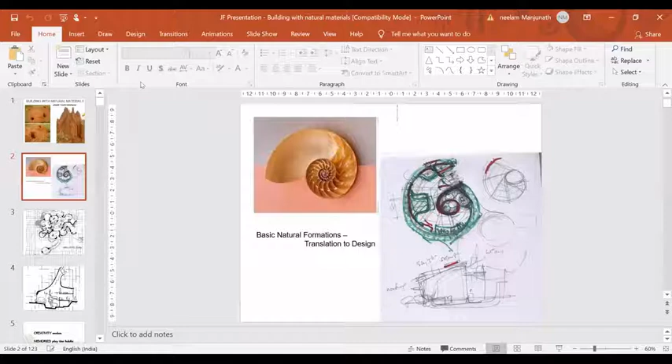This particular subject which you put to me, Tejas - are you going to run this as soon as I start, or afterwards you're going to run? How are you going to, where is he? The background? Hello? Yes, we've started, sir. Okay, when he starts it in the beginning, ask him to hold it. After that, he can continue with this. Is that okay? Hello? Can you hear me?

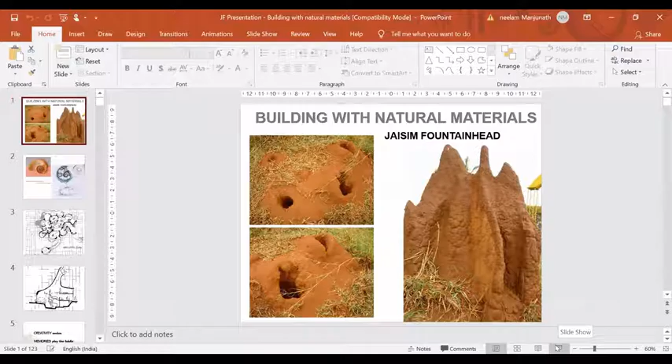Yes, Tejas, you can talk to sir when required in the meeting. Okay, they just hold this, and then I just started with, when you said building materials and things, the first slides and a few slides that will come are all been inspired by nature. These were the first few things I studied a number of times. You don't have to hold the slide too long. Hold it for the moment that you think I'll keep crossing across and going. No problem, okay, they just go ahead.

No problem. Yeah, next - this anthill has always been one of the most... nature is one of the most fascinating things, like the beehive and the various shells and things that happen to me.

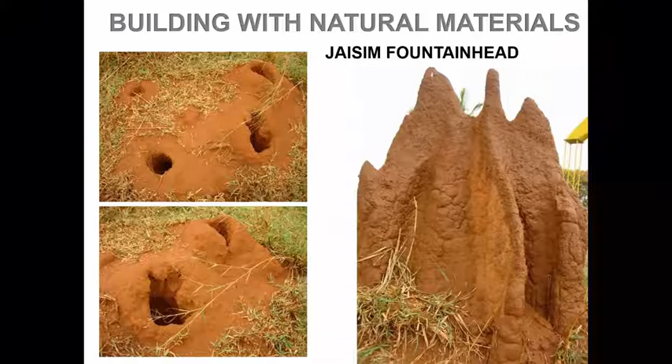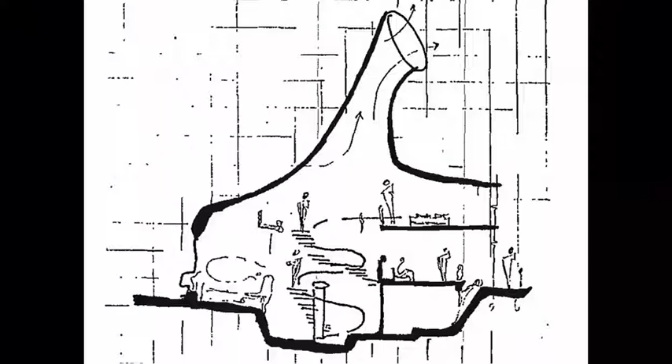Whenever people call about nature, I look at myself, my surroundings, my teachings. Great people, fascinating people have taught me. The journey has been on and on. But every time I come across this, I find, who is the ultimate of nature? The ultimate of nature is man, his ability to comprehend. He's not away from nature, he is the ultimate of nature. That is what has kept on pushing me, pushing me.

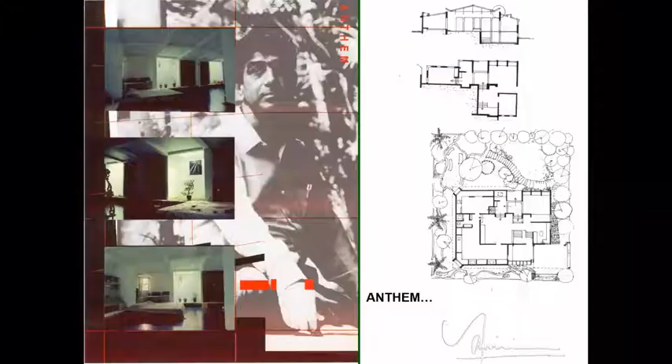Then I realized architecture is a journey. It is not something you finish, which is like nature, it never finishes, it is an evolving process. As these projects go on, each project teaches you something more to get onto the next project. And each stone and each clay block, each thing teaches you something to go on.

But every time somebody says, are you a natural architect? Are you a nature architect? I said, I'm neither a natural architect nor a nature's architect. Nature teaches me, but without technology, I couldn't touch nature. What is technology? That's the big question that keeps getting asked by the youngsters who keep looking at you.

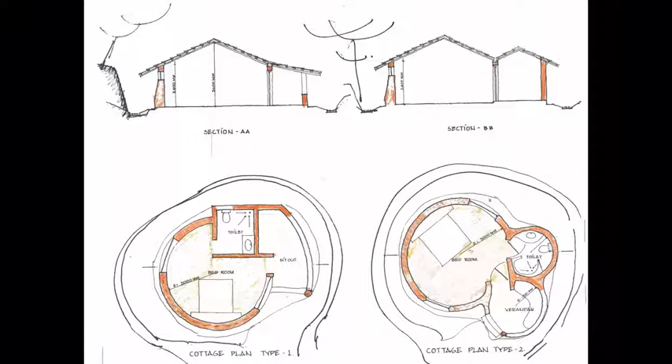Then it happens that something has happened in your mind. The mind, where does the mind come from? Yes, even animals and things have a mind and a brain, but they act within certain parameters of their lifestyle. They can't change it, very accidentally sometimes, but that is not always working. The most fascinating thing about the human mind is he thinks. If he doesn't think, he doesn't even belong to this.

Like this Rishi Valley school, that had just this modern thing, teaching these school children how to build, using local labor, local things, about 30 years old, pushing it together, cow dung, thatching roof, painting by the local artisans, and all these things worked. I find, are they natural?

Yes, they are natural to their environment, but they also have to learn. They had to learn, like this aerospace engineer, from one end we shift to another end. The aerospace engineer also looks at you and looks at the nautilus, that's why I showed you the shell and the beginning, the octopus. So how is the octopus? It's the most fascinating structure, which is again nature.

Nature teaches you in many ways, but nature teaches you in the sense, it doesn't come and teach, it is there, it lives there. It's up to you to go and look at it, to study it, to understand it, and then take it a step forward because your brain, your mind works.

Whereas with a bird or an animal, it just reacts, responds, and moves along to its future, maybe the death, maybe another generation, something happens. They live with their environment. Whereas the human being alone is a natural being of different characteristics. He can change what is before him, what is going to be after him, but he can't change what was before him, what is after him, what is with him. But when he changes that, he has to understand the nature of things.

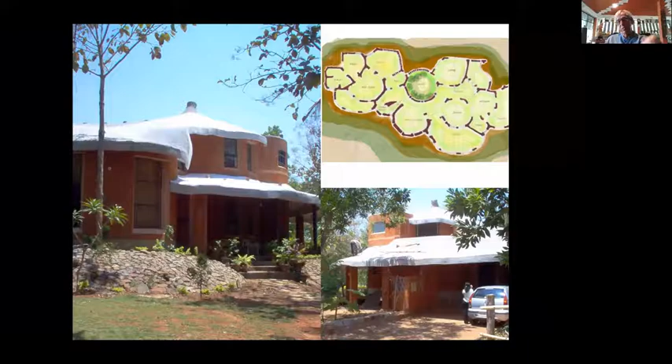Like I look at the crystals which were used for the roofing, white feldspar. It was the nature that looked at me, and I looked at it, and said why can't I use it? Technology and past engineering said no. I said, that is not nature. We have to look at the material and say, who has studied you? Why has anybody studied you?

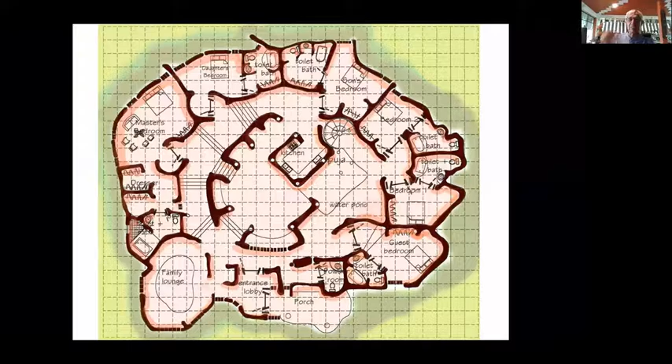When people ask for Vastu Shastra or patterns which create in their minds, you work with them and say, we will create an organic space for you. Now I'm using another word, the organic space. What is organic space?

It was fascinating to see him look at buildings as simple lines. The minimum is what you used to call them. The minimum it is. But then I looked at nature.

When I looked outside my window here and outside this window here, the combination of diversity really hits me. It really hits me to a point. This is when I start subtly differing from the Western concept of architecture, where they're very disciplined.

If one fellow builds house A, next fellow builds A, the whole housing colony is a repetition of the same type of housing. But when you come to India, when you come to the subcontinent, when you go down, you see the variety that happens. Yes, it's absolute chaos in the beginning. But if you start studying the chaos, then you look at nature.

Nature smiles and goes, only the gardener makes us orderly. Even with the gardener, nature fights. Each rose flowers where it wants, when it wants. The gardener cuts it and puts it in a pot.

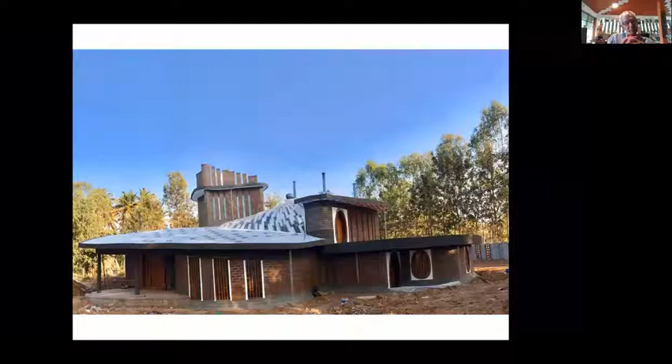When that plant grows vertically high, I was amazed to notice that no leaf on top sits on another leaf. It always moves out a little bit, the other moves out a little bit, and then it goes on. It's absolutely fascinating to see.

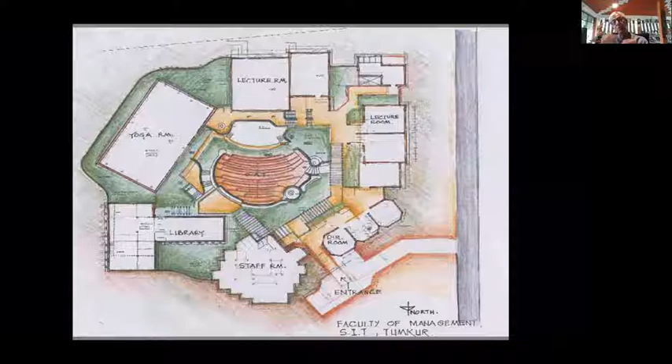That's what taught me to move modules of buildings away from each other, not to overcrowd like modern apartments are built one over the other. I call them non-architects, non-buildings, non-nature, but then they're also from nature. No, they are the absurdity of nature that's happening in modern architecture, built spaces here and around.

Why can't they subtly change, like that anthill in the beginning of the bird's hive afterwards, or like the tree in the beginning? Why can't each stone speak to us?

When we did this management school also, we looked at it and said, what can it teach you? Then we said fusion happens. In fusion, what happens? Can everything start fusing with one another? Like I said, nature's diversity is there. Then there's the question of bringing them together. What happens at that time?

That must, and this is very important to me. At that time, you just keep quiet, look at the tree, look at the flower, look at the animal, look at the bird, and then say, what do I do with you?

Like when we did this huge project, which was nothing but sheds of cigarette-making sheds, I said, it made cigarettes, it made money, now it has to transform itself into another avatar. What do I do? I talked to the building in a way of speaking. I talked to the building, it responded, and then to say, fascinating.

Let me change you. Let me have the challenge of changing you. I found we could create a new avatar in that building. That's the change of challenge which comes from nature.

These trees, cut just because they were natural trees, doesn't mean they have no other purposes. Nature teaches you and says, don't junk me. I will always be useful to you in one form or the other.

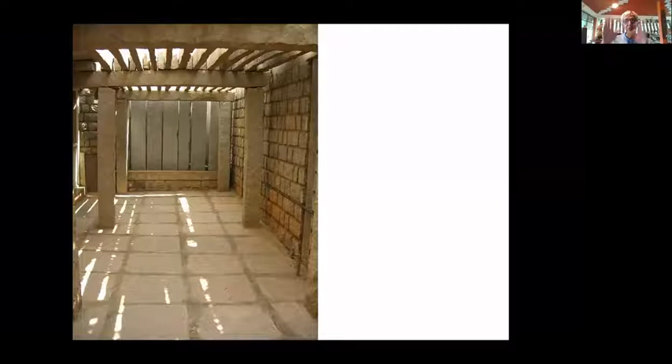It's a question of what your concept is. What does not belong to something? I was looking the other day, people were calling mud bath, dirty bath. Then I went to a small place here, a yoga center or something. I found all the women there covered with mud, eyes packed with mud, with lots of cow dung stuck on them. They didn't know the cow dung was also put on them. They were curing - that is their yoga bath.

There it becomes wealth, it is not thrown away. It's a question of how nature interacts with you, when, in which context, which complexity. Even when you go to the tribal village and use the Todas space where they've had something else, today it becomes something else - it becomes an auditorium. The boat was thrown away and it becomes a boardroom. It's a question of an architectural challenge that is accepted in nature.

Nature is very teaching for this. This is why I like saying nature teaches, teaches. But it doesn't push you. It doesn't fail you or pass you. It just smiles at you and goes away. And smiles at you again and says, you took the wrong turn, go back and take the right turn, or take the other turn. Then you find something else it does. But then you said you were thinking right, but you didn't combine it right.

When I looked at the stone blocks right behind me here, the stone was lying all over. People said, I have to buy blocks. But the stone said, I'm here. So automatically something happened - the same thing happened to the school and that process. Something keeps exchanging itself. We environmentalists, architects, have to get to the people and teach them the process of life, the process of urbanization, which can happen in a natural process.

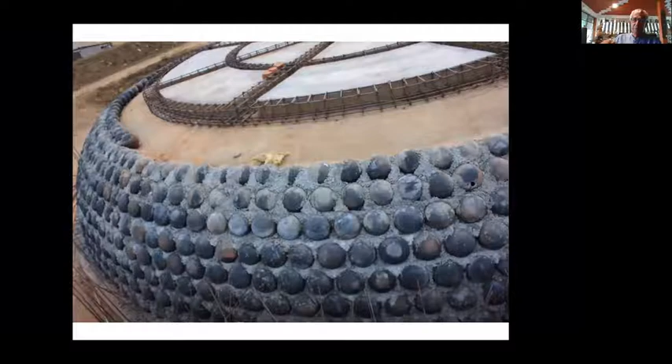The only time I find what is not natural is when the mind is driven by pure technology, forgetting the art part of it. And then the mind takes you on to the pure economics part of it, and the pure economics takes over. And when pure economics takes over, something comes one over the other, because economics says repeat and repeat. Like you are repeating the same slides again, now and then - sometimes, yeah, it's fun. But the process is very, very important. It must be very well understood.

So this is the last slide on this. Have I finished my time, or is there time left for anything else? Tell me, Nilam. I can go on and on, you know me better. You're muted, I can't hear you. Is there anything else, yeah. Yes, sir. Have I taken my full time off? Looks like so. No, sir, don't worry, it says 16:26 to me. Anyway, okay, is it okay? Yeah, some of the questions you have already asked, some more, so please - you have already shown.

We were talking about so many other kinds of natural materials and technologies for a very long time, and never shy of taking huge risks, which you have already shown and shared with us. But one material that you have extensively worked on is the hollow terracotta block. You have been instrumental in popularizing it and developing highly innovative construction systems to use it - making it dance to your tunes, literally. The roof becomes the wall becomes roof, and it goes from walls to columns to beams and walls. We are very eager to listen about that material, because you have done a lot of effort and we are all very inspired by the uses you have done with the hollow terracotta blocks.

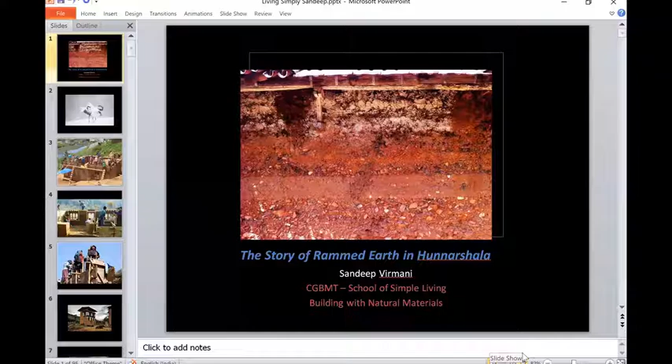Let me start with a few stories which have nothing to do with my work, but finally lead up to it. I was in Bhutan a few years ago trying to find this bird, the black-necked crane that comes from Tibet into Bhutan. It's a very rare bird, so I went to a remote village to look for it. Very early in the morning, about 5am, I heard these birds making their sound.

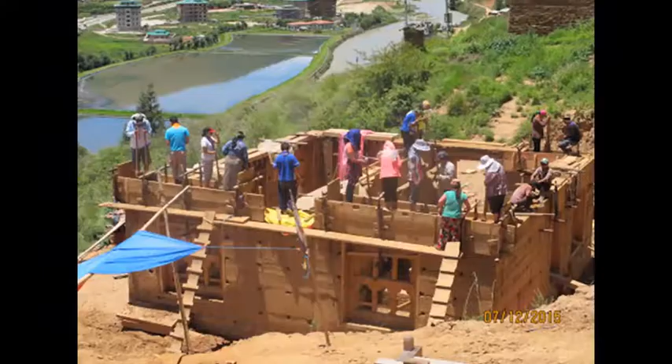As I moved towards the sound I heard some singing in the mist, and when I went towards it I found people like this - not this exact photo, I didn't have a camera with me, but this is what I found. A group of people on top of walls, ramming the wall, making new walls. There was one lady making buttered tea for all of them - about 20 or 25 young men and women building this wall at 5 in the morning. I was curious - they had a song, and the thumping was actually the drum or beat they gave themselves as the wall was being built.

When they all came down to have tea, they invited me to sit with them, and I learned they were all helping this widow build her house. They would work for about 2.5 hours in the morning, from 5 to 7:30, have breakfast made by the lady, then go off to their own work. This was free labor, free service to the widow. The fact that they were making a fantastic, beautiful wall was only incidental to the social construct of actually helping each other build their own homes - that's what I found fascinating.

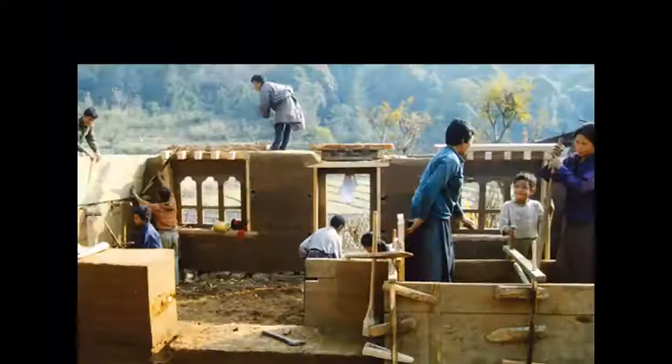In Bhutan they make amazing rammed earth buildings, 2.5, 3 stories high, without any cement or lime stabilization, simply with mud itself. These are the kind of homes that come up.

I want to take you to another story, much closer to home here in Kutch - the grasslands of the Banni region, where pastoral communities roam with their animals. It's a huge, beautiful landscape of 2,500 square kilometers, full of wildlife. The pastoralists have learned how to live with this nature and contribute to it. Unlike our urban areas where we take away from nature and try to control it, these people use simple aspects of nature for their own survival and living, while also contributing to nature and developing a fantastic economy.

So I will share with you that in this landscape, there are these buffalo breeders. These buffaloes go into their grasslands in the middle of the night and graze, because during the day it is 45 degrees centigrade temperature. The buffaloes graze on their own, nobody accompanying them. In the morning they come together at these water points, where they all get their water, and then sit down for the rest of the day to enjoy themselves.

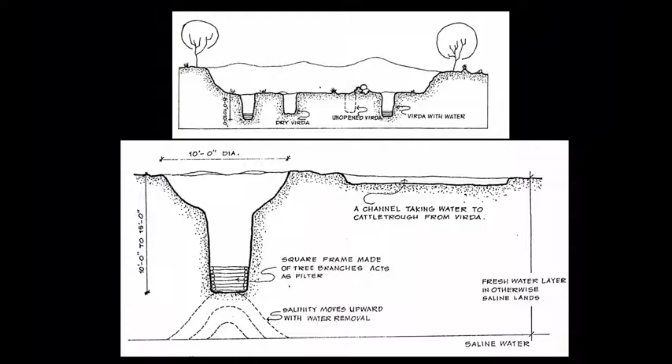So there is a very interesting practice over here called the abhat. Every well that is made like this is owned by one pastoralist. As the summers are coming close, the different pastoralists will call an abhat. This is an abhat that was called by one person, who asks everybody to come and help him make his well.

The idea is that if during the year you have had some kind of a fight or misunderstanding with anybody in your community, it becomes necessary that you call that person for the abhat. The story goes that when they call this person, they send the eldest from their family to go and invite him. If the person is very angry for what has happened in the year with him, he will refuse, saying, no, I'm not coming.

Then the family will send their youngest daughter to go and invite him. Once this little young girl comes and says, 'Kaka, please come and help us make our well,' the person's heart melts and he cannot say no, he has to come.

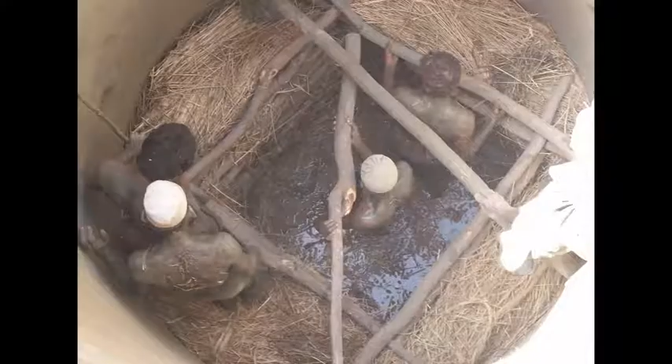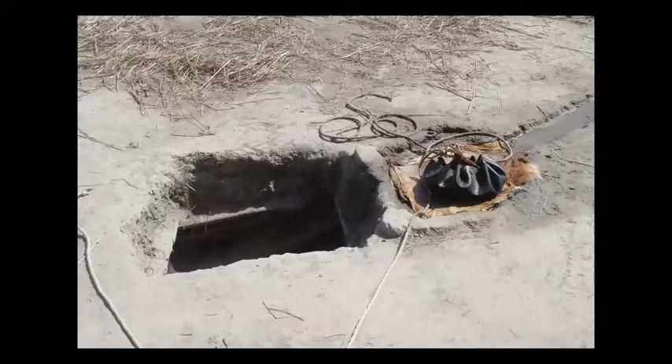So then they all get together and make this amazing well, which is made with the grass and wood from that region. This is the way it is finally completed. They draw water from it, pour it into a channel, and it comes into this trough, which is also completely made in mud.

From that, you can see in the corner there is a pathway where all the buffaloes are waiting, and then they come down to drink the water. The buffaloes also know that the trough is made with mud, so they are very careful when drinking so that it doesn't break. After that, everybody gets together and makes a meal, a biryani together, and they all eat together.

The reason why I'm telling you this story is that the entire process of building in rural areas is interwoven very carefully into the social practice of their region. The process itself is just as important as the well or the house itself. They make sure that any fights they might have had during the year, their ego must be consumed. They must invite that person with whom they've had a fight and make up during the process of building, so that the fight doesn't carry on into the next year.

Now this is extremely important because they're trying to build social capital amongst themselves. It is based on the social capital that they are able to be bold, they are able to be courageous, they're able to take on difficult decisions as a community.

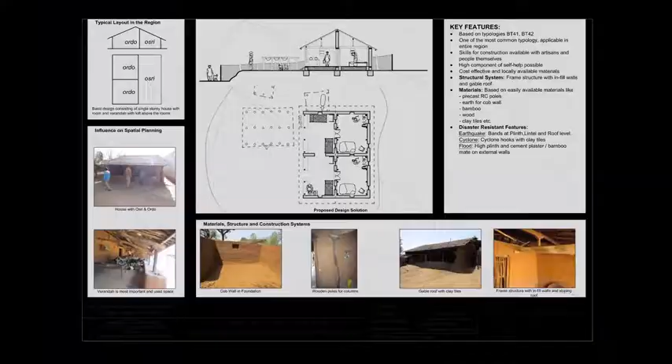They felt that it was only to be found in Ladakh or in Bhutan and not in India anymore. And yet in Gujarat, you found this 500-year-old tradition of making rammed earth homes. So these are the rammed earth homes that they build in the polo forests in the Aravalli range.

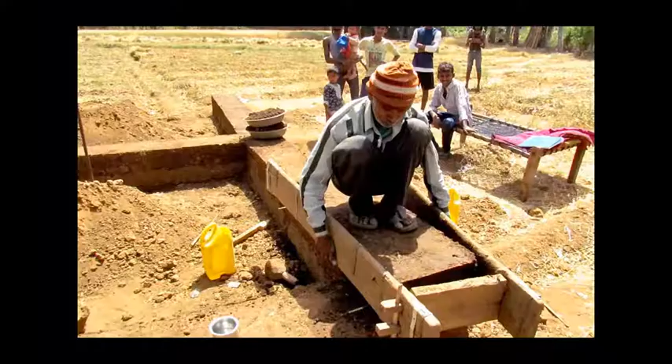They use very simple formworks like this. The practice is that they will remove the topsoil and dig up the soil below that, put water in it and leave that for about 3 or 4 days. After that, the mud just needs to be carried along with its various stone pieces in it and put into a formwork like this and be converted into walls like this.

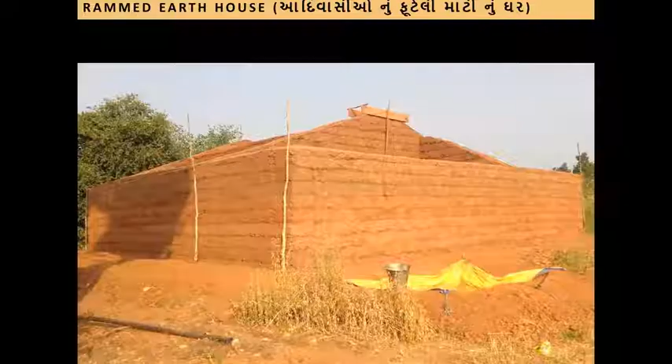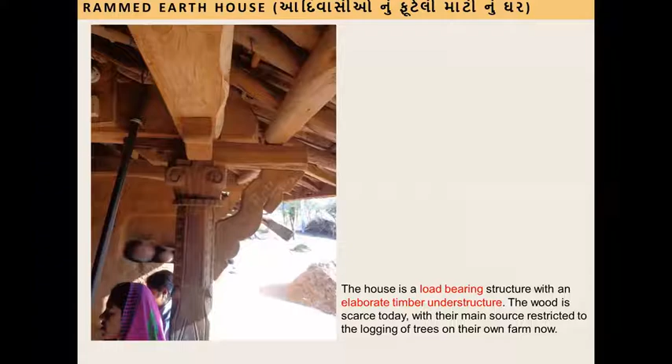So we documented this entire process with them. And then we sat down to redesign it for them, with them. We wanted to understand what their aspirations would be, what is it that they would like to change in this house that they make.

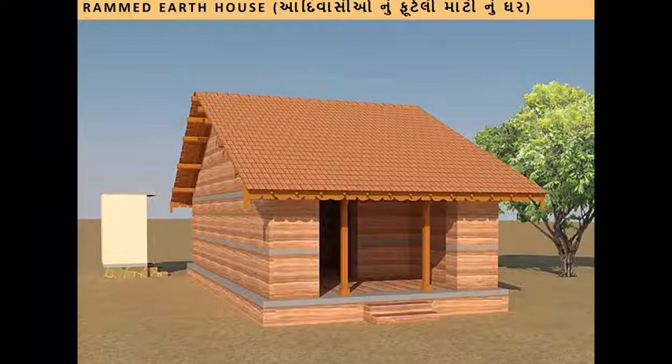And we came up with this as a social house which the government of Gujarat would agree to support. However, now coming to your question, Neelam, how do we convince governments to allow them to make rammed earth or even mud houses at all?

So a very high-powered technical committee had been put in place, and engineers from IITs and various other places were on this technical committee. And when we shared this with them, they were surprised, and they said, no, we are sorry, mud is something we cannot agree to. So we said, why don't we make one with the community and see what happens.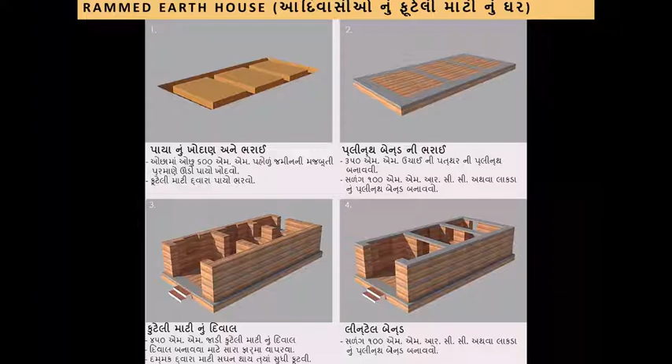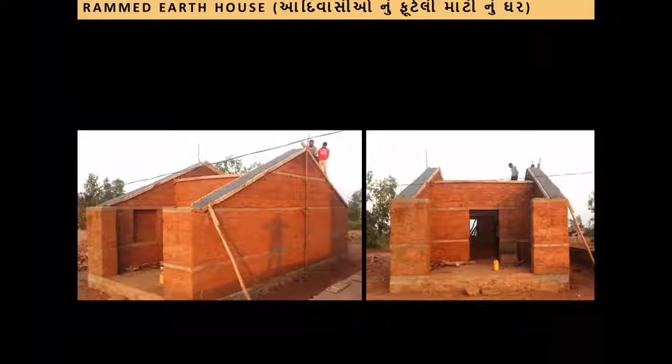So as a sample house, they agreed. This is the whole document, this was the entire documentation process, and this was the sample house that we made with the community. We put in these steel bands because it's an earthquake prone area, to connect the entire house together. And this was the house that was built.

But yet the technical committee was saying, can you supply us data to tell us why this is so strong? Because we showed them houses which are more than 100 years old and were standing perfectly all right. And they said, we understand that this is a strong house, but until and unless we don't understand the science behind why it is so strong, it will be difficult for us to put our signatures on it.

So we went to INTACH. We took a small grant from them because INTACH was keen on documenting living heritages in our country. And then we studied their sociology - I won't go into all these different aspects - but we studied their tools, their measurement systems, their proportions, and their materials.

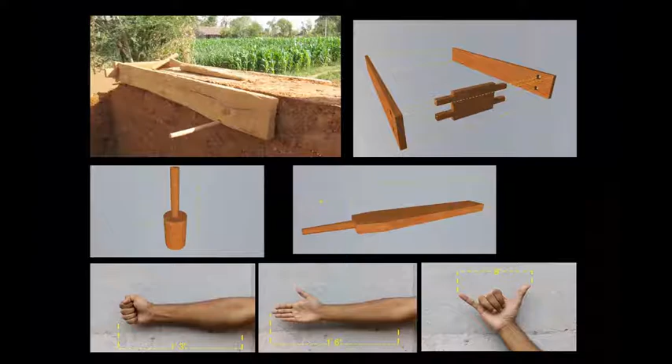So we took the soil, we did the soil analysis, and it was an amazing thing that came out. The soil was made of laterite. These were laterite soils. When Dean talks about laterite stones in his region in the next presentation, this is the soil that actually becomes stone over a geological period of time.

What happens is that when it is below the earth, it is only ferrous. But when it is exposed to the atmosphere, it combines with the oxygen in the air and starts forming ferrous oxides - Fe2O3, Fe3O4. That process of oxidation is called induration, and it actually starts converting the soil into rock, because the ferrous oxides are binding agents. So you don't need to add any lime or cement to stabilize the soil at all, because the ferrous oxides, over a period of 2 or 3 years in the wall itself, make it so strong that it can last for hundreds of years.

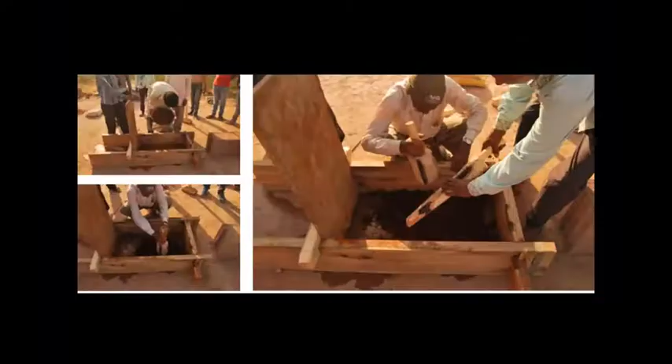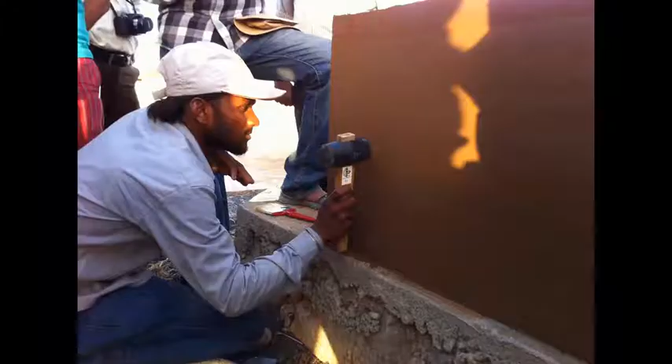Unfortunately, these are the very artisans who come to our cities and we treat them very badly. We don't even talk to them. As Jaisim said, until and unless you're having a dialogue from top to bottom, you're not going to be able to do any innovations or creation of new designs. These are people who otherwise have tremendous knowledge of not just technical work, but also building social capital through technology. So we convinced some of these young boys to form their own companies and start providing their knowledge and skills to us in our cities.

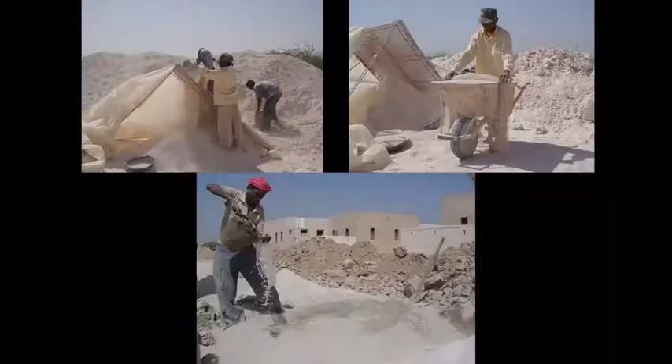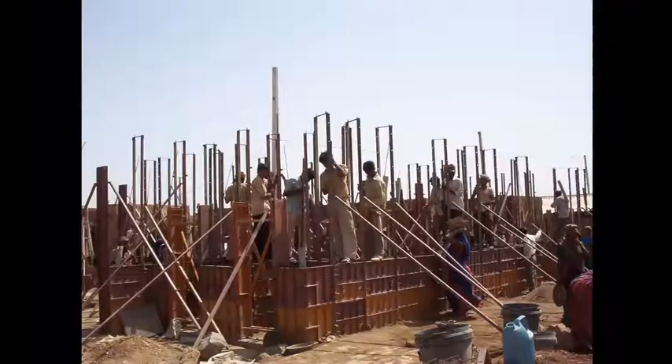Until and unless we don't have such artisans, it becomes difficult for us to build. So these companies are now providing services to many architects to achieve their dreams of what they want in natural materials. There was Ramesh, who now runs a company called Layers, and provides rammed earth and soil block technologies to people all over the country. His own turnover is about 20 to 30 crores a year. And this is the kind of buildings that he's helping us do, and helping other architects.

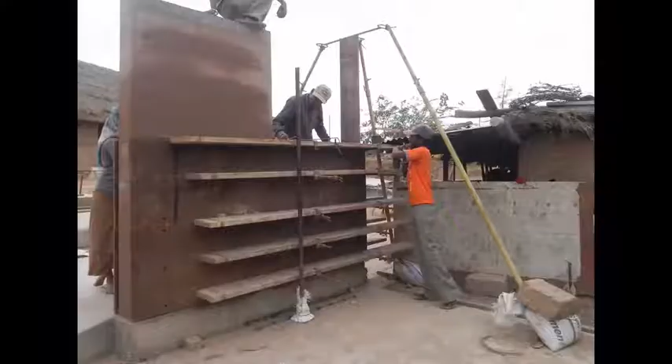This was about 400 homes in rammed earth that we did after the earthquake in the city of Bhuj. Along with him, we have developed various types of formwork to be able to make good rammed earth walls. We now use a lot of industrial waste. This white wall you see is actually from China clay factories, their variegated wastes now converted into walls.

These are cob walls. For every material, we have a community who traditionally used to do it, but is now bringing new sensibilities into it. So this thatched roof you can see is something we learned in Indonesia and Bali from the artisans there, and it has a life of more than 10 to 15 years.

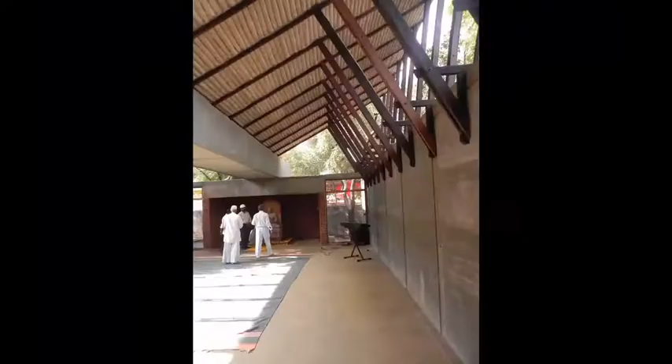This is a project by Sandeep Virmani, where we helped him with all the artisanal skills. This wall is also rammed earth, but done with fly ash. So once you understand the science behind a technology, you can use any material to be able to create those types of structures.

However, we have complicated it. When we asked these artisans from the polo forests and showed them the way we are doing rammed earth, they said, this is very complicated - we find your ways of doing things complicating something which is very simple. So here we need to modify the soils. Sometimes you have to add sand into it, sometimes clay, sometimes lime, sometimes something else. We have to have a rigorous testing mechanism before these rammed earth walls can be done.

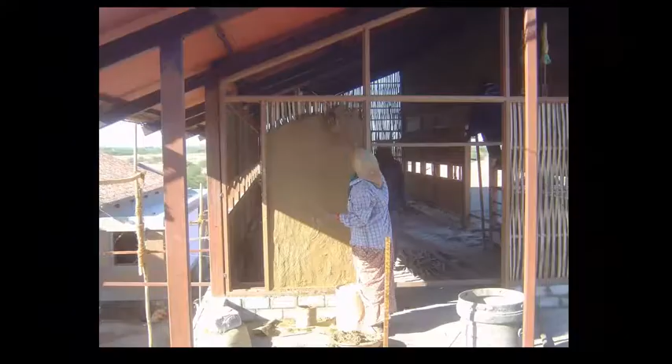These are wattle and daub walls, so below you have rammed earth, on top you have wattle and daub. This is a project by Professor Chaya with lime plasters on it. These are the rural housing that was done in rammed earth for the region in Kutch.

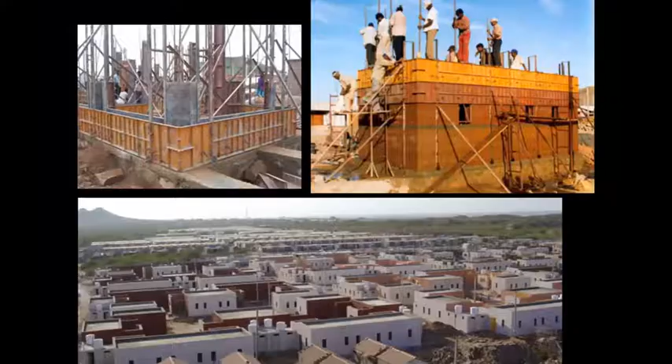This is something we learned - these are called shallow domes or cloister domes, still practiced in Western Uttar Pradesh, where only a group of about 40 villages have these highly amazing artisans who can make these walls and roofs. They're completely made in mud, but flat roofs, so you can build over it, which allows you to save huge in terms of embodied energies in steel and cement - you reduce it by almost 70%.

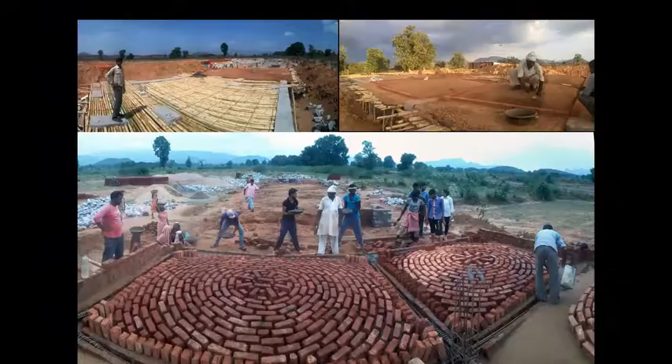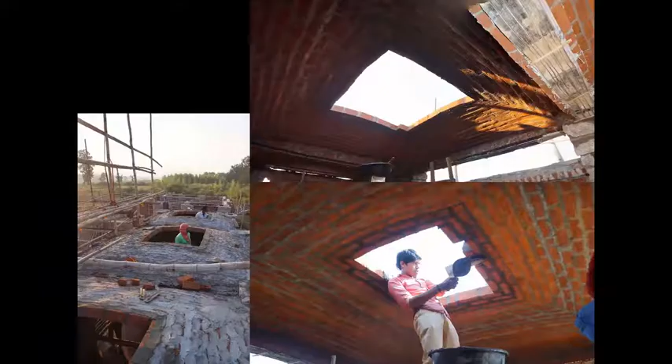This is a project where our artisans are helping Laurent Fournier in Calcutta. He's a French architect. And you can make these walls, these roofs, like this.

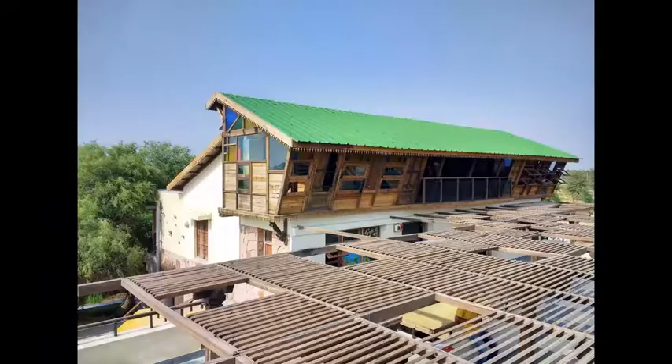This is a project in Jodhpur where a lot of very interesting artisans are there. Our entire approach is that you should be able to build within 20 to 50 kilometers, procuring all the skills and materials within that region. India is amazingly rich - every 20 kilometers, you'll find a new technology, a new innovation, based on an understanding of a natural principle in that area.

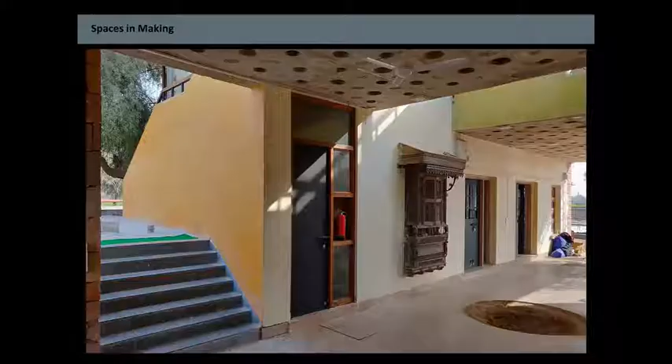Unfortunately, our students only go and do very little work in the rural areas, and as a result, are bereft of being able to understand this rich, living heritage that we have.

Thank you, I'll stop over here. If you have any more questions, we can discuss that. Have I gone over the time? Yeah, I think you can. You have done most of it.

We have a lot of students from many colleges coming. We almost train about 500 to 1,000 students every year in short workshops of 3 to 7 days.

Whenever I go and give lectures in colleges, I always ask one question: how many students would want to go into the villages more than they are being able to do today? And 90% will put up their hands. Then I ask a second question: how many students would like to learn to use their own hands and actually, during the 5 years of their education, make buildings on their own? And all of them put up their hands.

That is something we must understand about how learning happens. Learning doesn't happen only in the mind. Learning happens when the heart, hands, and mind come together. When you call an electrician or a plumber home and ask what the problem is, he will not start taking out drawings and reading them. He will start using his hands, seeing where the problem is, and try out different things to find a solution. It's very important, but unfortunately we have become so cerebral in our teaching that we have stopped learning with our own hands. The heart is very important because that is the energy principle - until you are not driven about doing something, you can't achieve it. So our entire architectural education is, let me say, bullshit.

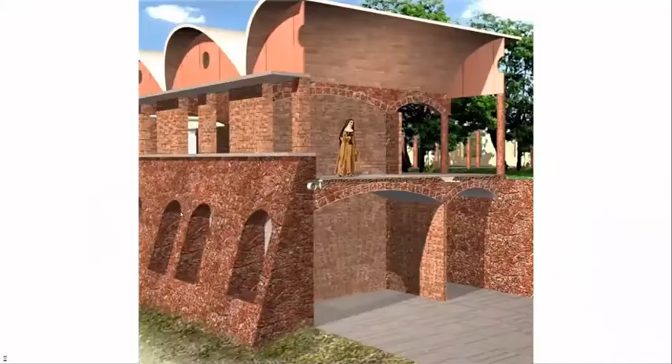Oops. Oop, I know where it's jumping. One second. Go backwards. Yeah, sorry, the slides are jumping. Okay.

We started working in a very Laurie Baker style, influenced by Baker's work. This is our office, our first office, where we inherited this building, which was in very bad shape. So we created a screen wall around it using bricks, in a Baker-like approach, letting filtered light into the space. There were no real doors and windows to the place, it was a fairly open pavilion.

It was influenced by using natural materials available locally, especially laterite, which is in abundance. The early buildings we actually constructed ourselves, since we operated not just as architects but as contractors as well, and built all the buildings we designed. We recycled old materials, doors, windows, floors, roofing systems, whatever we could find to create these buildings.

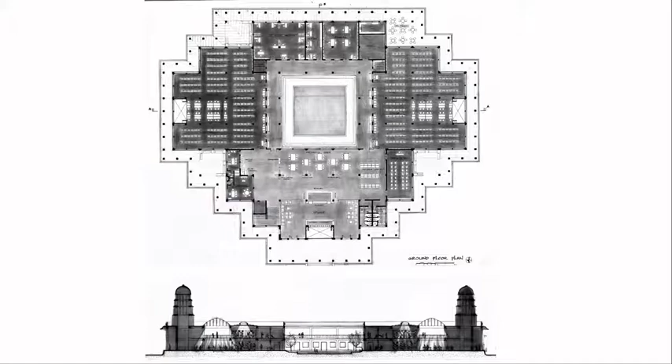We also recalled traditional building systems. That's the plan of the building, a giant colonnade all around. Wherever we could, like even a stone roofing system, we used a stone roofing system. The gopurams are actually wind towers that hydrate the air at a high level and allow the cool, hydrated air to enter. This is the library building of the university, and that's the structural and ventilation systems you see.

This is a project, a monastery for the nuns. It's a cloistered monastery, meaning they're not allowed to go outside the building and nobody is allowed to come inside. So obviously we had to do a building that will last hundreds of years without any maintenance, and the only way you can do that is a full masonry building. So this is actually a full masonry building. But being in Goa, we compromised a bit and put in a traditional roofing system to give that anchor of Goa. Working with the government also, we said we have to have a building which local people can construct here.

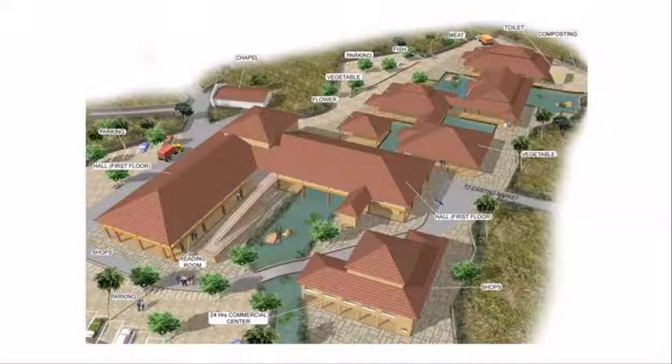So this was a marketplace. Instead of doing that typical new marketplace with glass facades and Alucobond things, we said let's recall a traditional pavilion style marketplace which can be built locally by local people. So that's the marketplace we have.

We work a lot in eco-sensitive areas, in CRZ areas, in jungle areas, so we have to be extremely sensitive about what we want to do. This is in a CRZ area where there was an existing house and we had to add these pavilions which could be dismantled easily. We used very lightweight pavilions, recycled wood as far as we could, and plywood, which is not that great, but we used it to create a lightweight structure that can be dismantled. It actually floats above the ground, and to prove that, we even lifted a piece of furniture in it to create a very lightweight pavilion.

We realized temporary architecture is really a great way to go. It's a building which is so low on its environmental footprint, it uses natural materials. This is for the Taj in Bentota, Sri Lanka. Since we have a product design wing to our office, we're able to prototype the furniture, lighting, and everything in the project, get prototypes and get it built on site if necessary.

This is for the Taj in Goa, another 40-seater restaurant, again bamboo, balis, thatch. This cost about 9 lakhs. Being a 40-seater Taj restaurant, it earns a profit of 50,000 rupees a day, which means they've covered the cost of the building in 2 weeks flat. So besides an ecological advantage, it's also an economic advantage, actually going and using natural materials which are temporary in nature, very low cost.

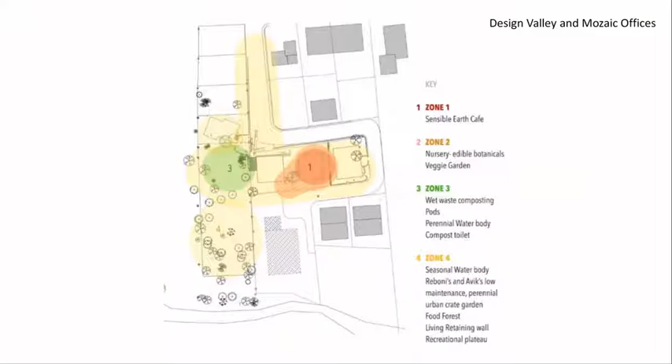And this comes to our office, which is part of Design Valley, where we all live together in this almost commune-like space. So we have three buildings actually: the architectural building on the left, the product line building on the right, and the design center.

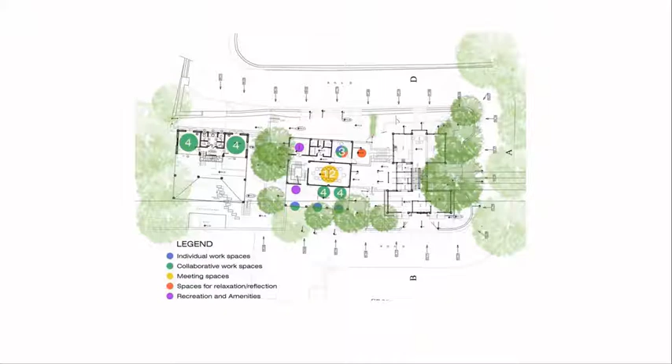So the design center is an outreach space where basically we try and educate people on issues of creativity, and the potential of creativity to actually address environmental and social issues. So this is a common space for a lot of people in the area in North Goa to come, converge, share their experiences, and brainstorm on issues.

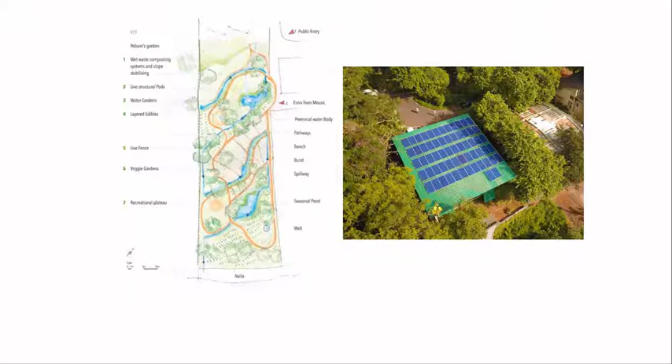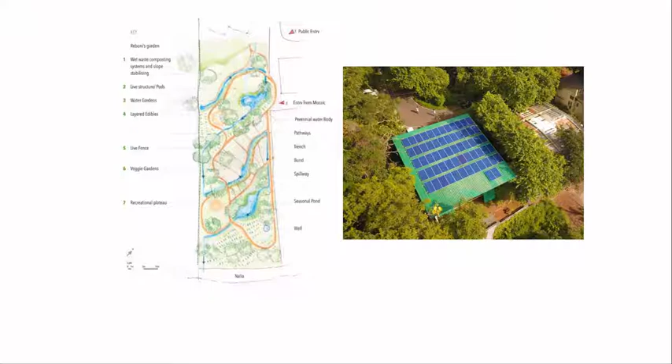But when you talk about sustainability, it's not just about technology and materials. It's also about how you involve people in actually taking action. So these are our office spaces, which we use to collaborate, create programs, and it's all about actually bringing people together.

And so there are a lot of events that we host, and we really try and spread the good word when it comes to getting people to collaborate and to understand the nuances through specialists in the areas, whether it's permaculture, solar energy, or water harvesting. So how do we actually get these ideas together, share them, and empower local communities in understanding and taking these concepts forward?

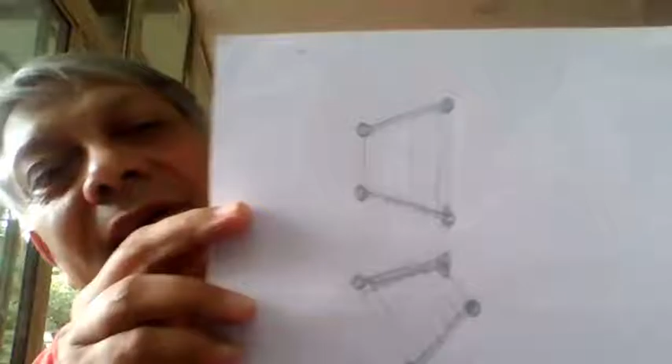As an architect, you might think, okay, between a 3 and 5 meter system, let's just do a 4 meter grid—cutting the longer ones and wasting the smaller ones. But I said, what if we actually use everything from 3 meters to 5 meters? So I sketched out a structure using the 3 meter trunks here and the 5 meter there, tapering it down, then flipping the grid to get 5 meters here and 3 meters there.

So if you want a straight line, if you want to twist the building, you can actually put 5 meters here and 3 meters there. So using all the wood over there, you can actually start articulating the building, not only using all the material, but you also get an interesting plan going. That's what I mean by innovation, where you take it beyond the typical thing. So yes, use the traditional system, but can you tweak it a little? That's, I think, a way that we as architects and designers should take what is normally handed down from generation to generation, and turn it to advantage.

I think this is another question to Sandeep about rammed earth walls, about longevity and quality control in rammed earth walls.

So actually all rammed earth structures, they last probably longer than concrete walls or cement blocks, because of the technique involved. Basically clay is used as a binding agent, and the clay and lime that you put into it—the initial strength may be provided with a little bit of cement, but the long-term strength comes into the building through the chemical reaction that the lime and clay go through with the particles around it. So over a period of a few years, the mud wall actually becomes very, very strong. That is why we have found cob walls which are difficult to break even with a bulldozer. We found in all our villages around, if you go, you will find mud structures, rammed earth structures more than 100 years old. I don't think any modern material can match up to that. Concrete itself doesn't have a life in tropical areas of more than 70 to 80 years.